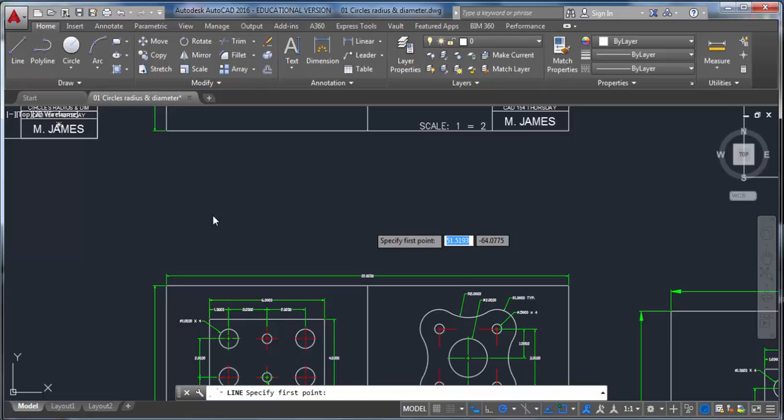Start the first drawing here. I would recommend starting with the outside rectangle. Notice it is 6 by 4 inches.

Let's click on the line tool. You can also hit L on the keyboard for line, and enter. Click somewhere on your screen to start.

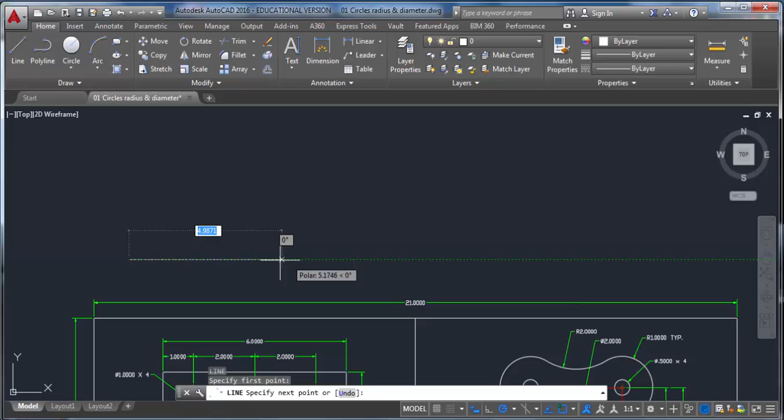Move your mouse to the right, making sure it's snapping straight on that polar green dashed line. Type in 6 and enter. Then go up 4 inches and enter. Go back to the left, 6 and enter. I like to click it closed and hit the escape key to finish the command.

Now we need to find the center location of this hole, and as a matter of fact, all the holes. Notice that it is 1 inch over from the left. Going down, if the whole thing is 4 minus 2 minus the additional 1, that leaves you 1 inch left. So it's 1 inch over, 1 inch down.

Notice these circles are all 1 inch up. And 2 plus 2 is 4, plus 1 is 5, 6 minus 5 is 1 inch over. So it's 1 inch the whole way around.

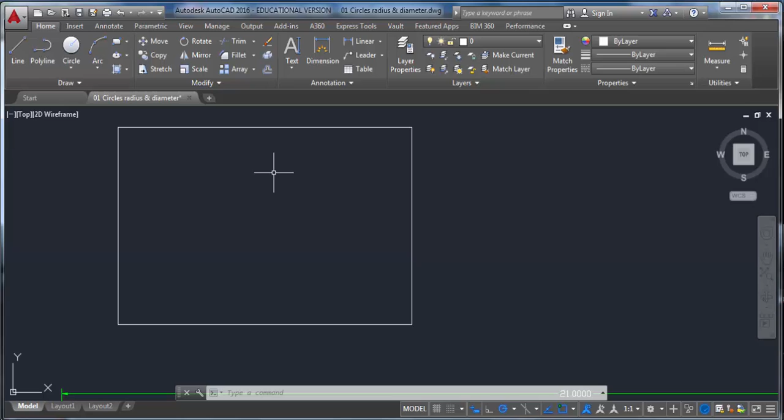The command I'd like to use is the offset command. Hit offset, specify the distance - we just said it's 1 inch, so 1 and enter. Then select the object to offset.

This is where you click on the line and then click on the direction you want it to go. I want it to go in towards the center, so I'm going to grab the top line and click down in towards the center. Click, select that line and click, select this line and click. To finish your command, you can either hit enter or escape.

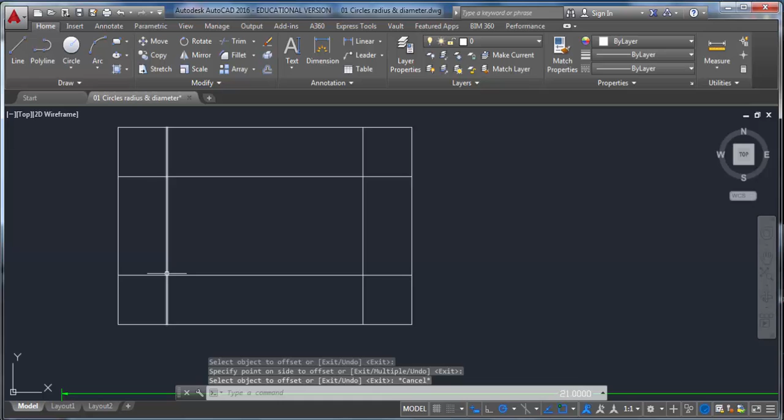So this gives us the center point for the 4 circles around the outside. Now, if you notice the size of this circle, you have this little circle with a slash through it - that symbol stands for diameter, and that's very important. So it's a diameter of 1 inch, times 4, meaning there are 1, 2, 3, 4 of them. It's not a diameter of 4, it's just telling you there are 4 of them.

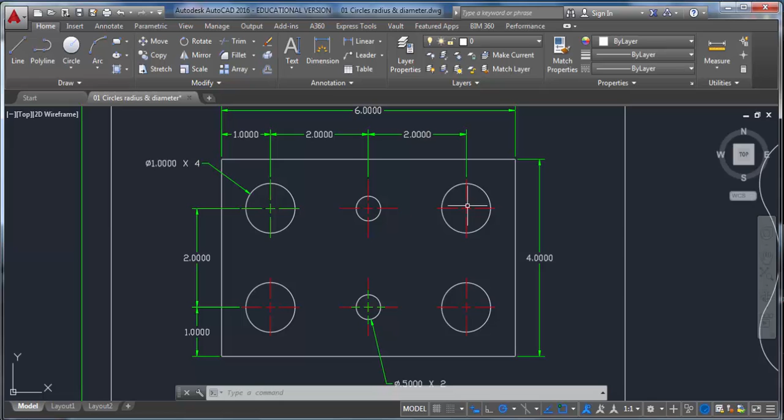To draw a circle, we go up to our circle drop down. We have a bunch of options - make sure you click on the correct center diameter, because that's what the dimension asks for. Then it says specify the center point for the circle. We said the center point is where those 2 lines intersect each other.

Notice that if I hover, if you have the object snap on, it should show up. Go ahead and click. If you drag out your mouse, you can see you're dragging out the size of the circle, and we want a diameter of 1, so 1 and enter.

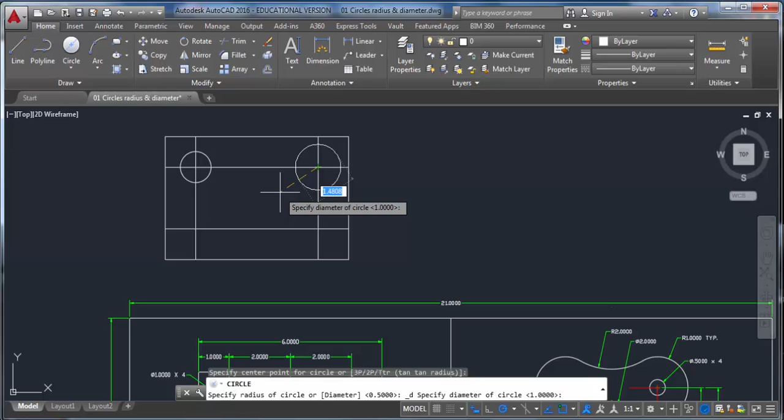We repeat that 3 more times: circle, diameter, click on the center point. Notice on the screen it says specify diameter of circle with a bracket showing 1 inch - it remembers the last thing we entered. So instead of entering 1 again, I can just hit enter, because it remembers the 1 inch. Circle, center diameter, click on the center point, hit enter. Again, circle, center diameter, click on the center point, and hit enter because it remembers that command.

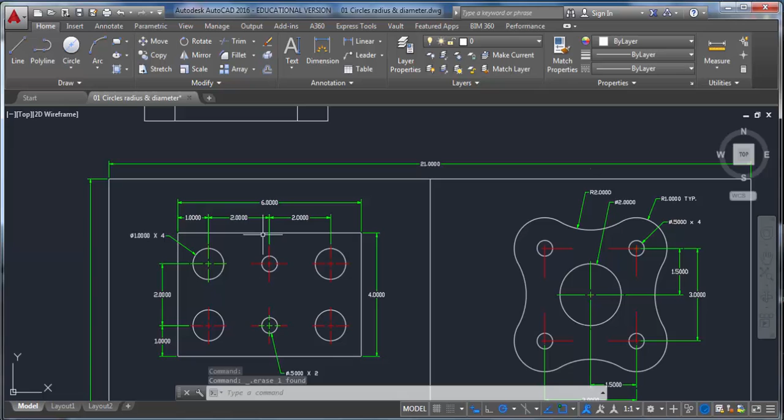Now, before we get rid of these lines, let's do the next one. Notice it's 2 inches offset from the last hole. So I can do offset, type in a distance of 2 and enter, click on this line and offset it over 2. Another way to do it is, since we know the whole thing is 6 inches and this hole is located 3 inches over - that's halfway - we could have just drawn a line from the midpoint down. There's always more than one way to do these drawings.

All right, we got our center location for our next hole. We have to find the size of it. Right here it says diameter of 0.5, and that there are 2 of them.

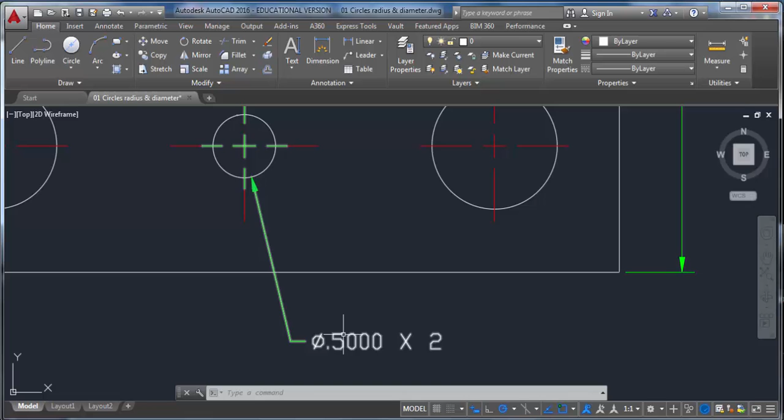Circle, center diameter, click on the center point. Now we've got to enter a new dimension, 0.5, and enter. And there you go. Circle, center diameter, click on the center point. We don't need to enter 0.5 because we already did, we can just hit enter.

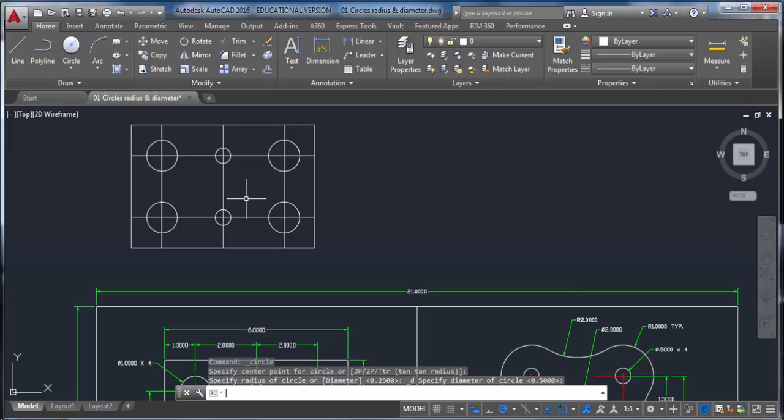Now the fast way to get rid of these lines is not to trim them. If you trim them, it's going to take too long. Just click on them, I like to click all of them at once. As a matter of fact, I draw a green rectangle and grab all 3 of those at once, then just hit the delete key on your keyboard.

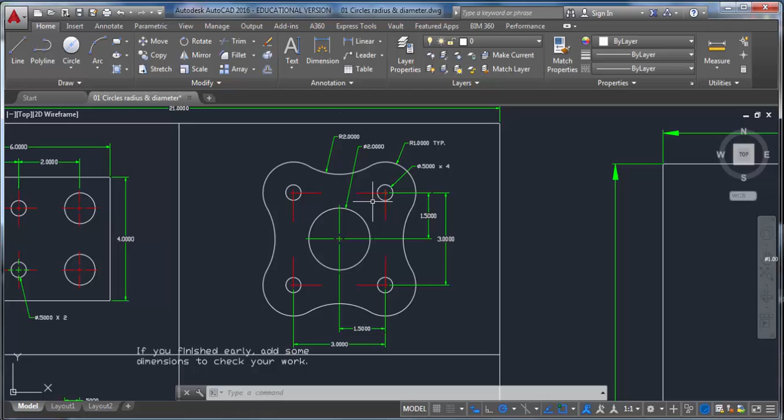It's that easy. The second one, we need to find the center of these 4 holes. Well, if you look at it, they pretty much make up a square, a 3 inch by 3 inch square. So that's what we're going to draw. Go line tool, click somewhere on your screen, and make a 3-inch by 3-inch square.

Another way that you can close this is if you look down on the command line, you can do C for close. If I type in C and enter, it will automatically close it.

All right, we need to get the size of these holes, diameter of 0.5 again. So we're going to go up to circle, center diameter, click on the center. The diameter is 0.5, which is actually still what we had from the last time, so I can hit enter. Circle, center diameter, click. If you need to enter 0.5, do it, I already have it entered. And we're going to do this a total of 4 times.

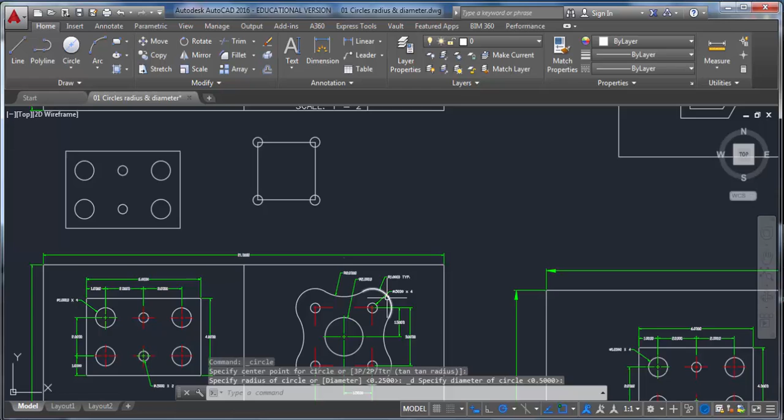Now, these big arcs are circles that have been trimmed out. And if we look at this dimension right here, it has an R. R stands for radius. Notice that there is a center radius option. TYP stands for typical, so it's saying that this is a radius of 1 inch typical, meaning that there's a bunch of them, 4 in this case.

So let's go up to the circle drop down, go to center radius now. Notice that this icon, after I click on this, changes to the radius icon. Just like before, we have to click on the center point first, then you type in your radius, 1, and enter.

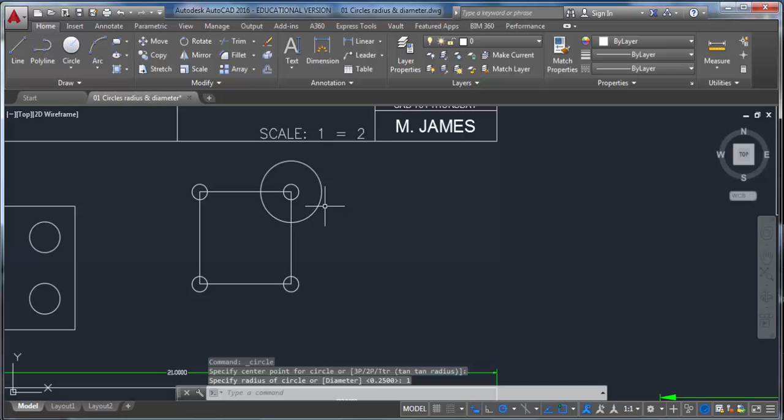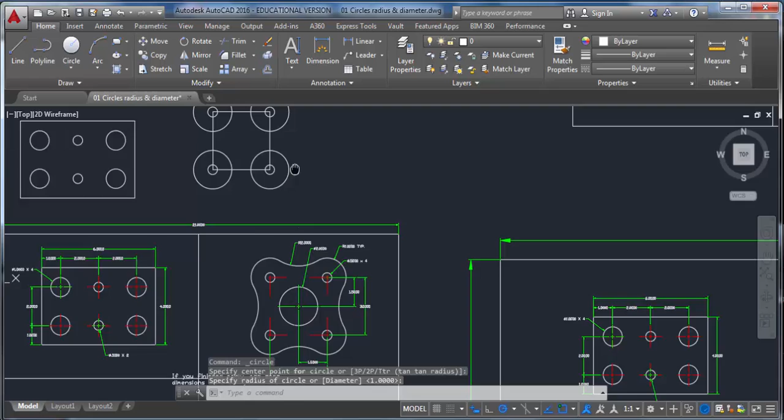Circle, center radius, click on the center point, 1 and enter. Center radius, click on the center point. You don't have to enter 1 because it remembers, but if you'd like to, you can. And there we go. Now, get the big arc that touches those 2 circles.

Notice that it touches only 1 location here and 1 location there. That's called tangent. We don't know where the center point is, it doesn't tell us where this is at. So we can use a new tool. Under the circle menu, the drop down, click on tan radius.

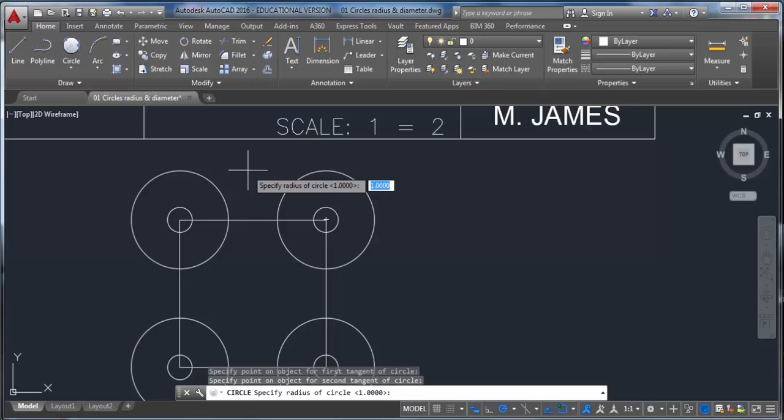If you read the command, it says specify a point on the object for the first tangent. We're going to click on this circle roughly in this area. Go ahead and click. And then move your mouse to the opposite circle, also in that kind of area, and click for the second tangent. There's your tan. And now it's asking for the radius, which if you look at the sheet, it says an R2, so it's a radius of 2, and enter.

Okay, we do that 3 more times. Circle, tan radius, click on the one, click on the other one. It remembers 2, so I can just hit enter. Circle, tan radius, click, enter. Circle, tan radius, click, enter.

Now, before we start trimming, let's just get this hole in the center finished. A fast way to find the center of a rectangle or square is to draw a line diagonal, and then the midpoint of that line is the center of the box.

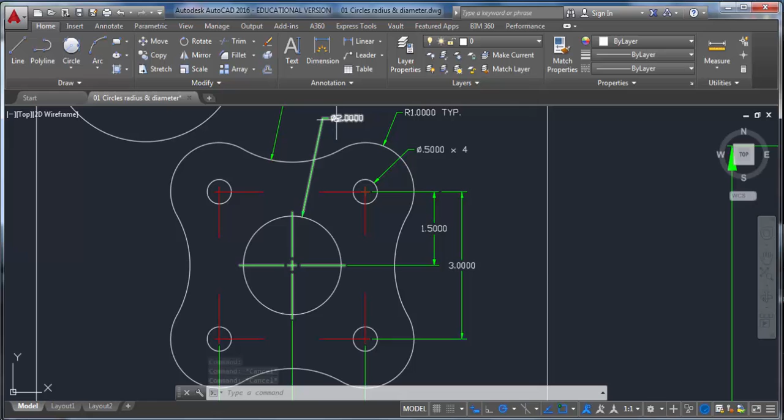We've got to get the size. The size is a diameter of 2, so we're going to use circle center diameter because that's what the dimension says. Find that midpoint, make sure you have your midpoint object snap turned on, those need to be on. Click on the midpoint, enter the diameter of 2 and enter. And there we go, we can start trimming.

Now, the first thing I would do is select and delete these lines. Let's just get them out of the way before we even start to trim.

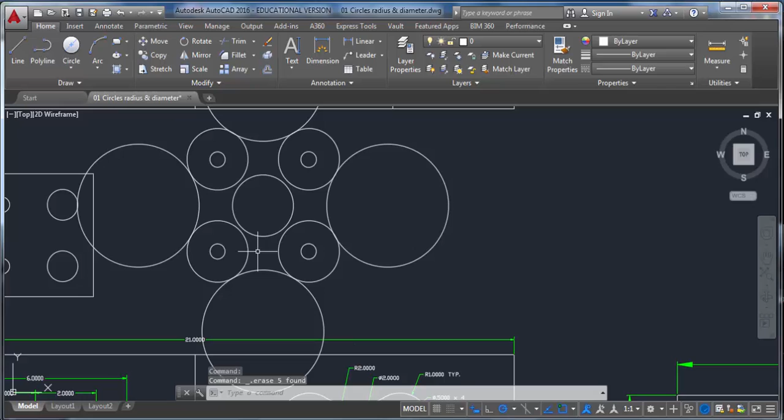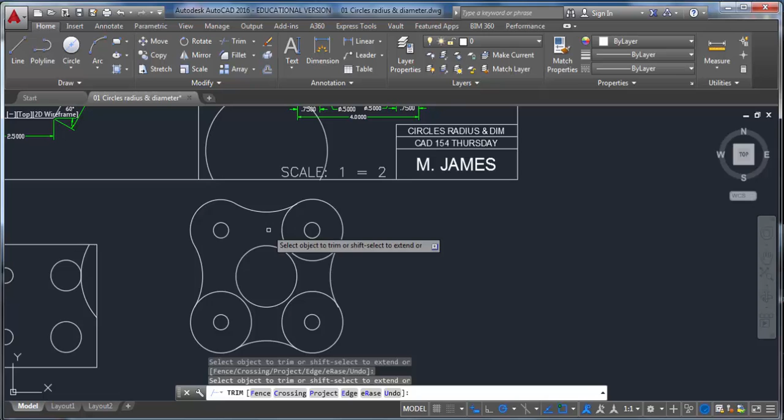Next, let's trim off the circle. So we're going to go to trim, and then we want to select all, so we have to hit enter. Remember, it's trim and enter. And we're going to trim off by clicking on these circles here, and then don't forget to trim out the inside parts here. When you're done, you can hit escape. I'm just going to select and delete these since I have so much stuff on my screen and get rid of those.